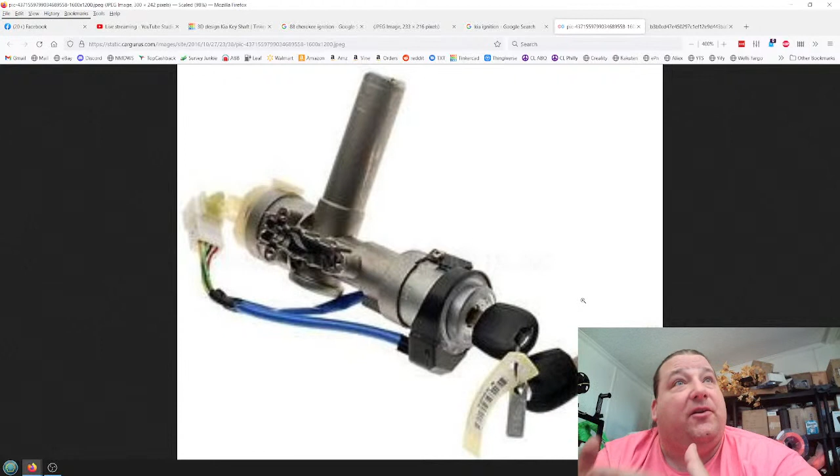The problem is a current modern car has an ignition like this, where the torque is borne by the key itself. You actually have to twist the key to turn the ignition. And that's where the 3D print gets icky, because what happens is you break the key.

See how it's all twisted up? See how the key gets broken? This was because I used silk, and that's where it sticks into the car, and it twists, it literally twists the key. And it breaks the key.

PLA actually works better, it's much stiffer. Silk is a bad choice. That just happens to be what was in the printer.

And now that means that creates a problem where you don't want to use resin, because resin is a homogeneous material. It doesn't have a preference of direction.

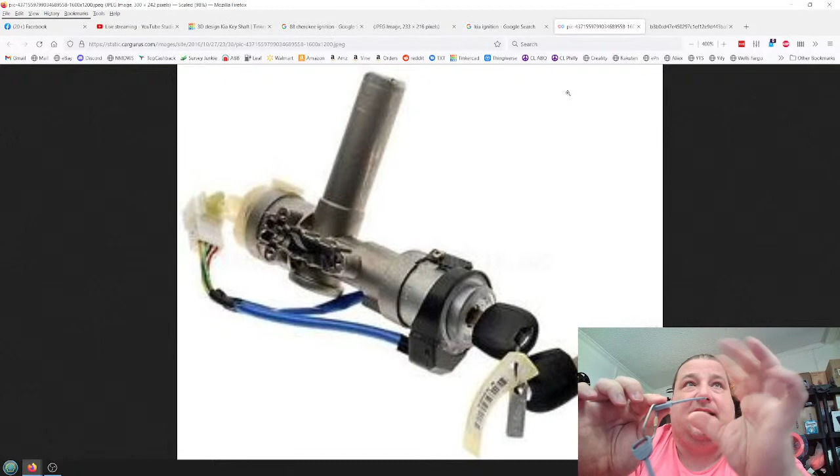And so what will happen is you will break this key off in the ignition, and then you're in trouble. Because as you can see, this will bend a lot. It's very, very bendy, and that's a problem because the key has to bear the torque.

As beautiful as the key is, I think I might have a way around it. I'm trying to find a way of doing it with just a 3D print. This here is a two-piece key. So I print the key part and I print the fob part. The nice thing is you print off a couple of these fobs and leave them lying around.

Then all you gotta do is print this if you ever lose your key. This is a 10-minute print because it's only 15 layers thick, 3 millimeters thick. So this just inserts into this, and there you go. That's a pretty good friction fit. I even got the Kia logo on there. Just why not, you know?

That print's standing up like that. Petg is softer, what I need is harder. Carbon fiber is a problem because it compromises the material. All carbon fiber filaments are weaker than their non-carbon fiber equivalents, because the carbon fiber is creating voids in the plastic, and those voids are where the plastic will break.

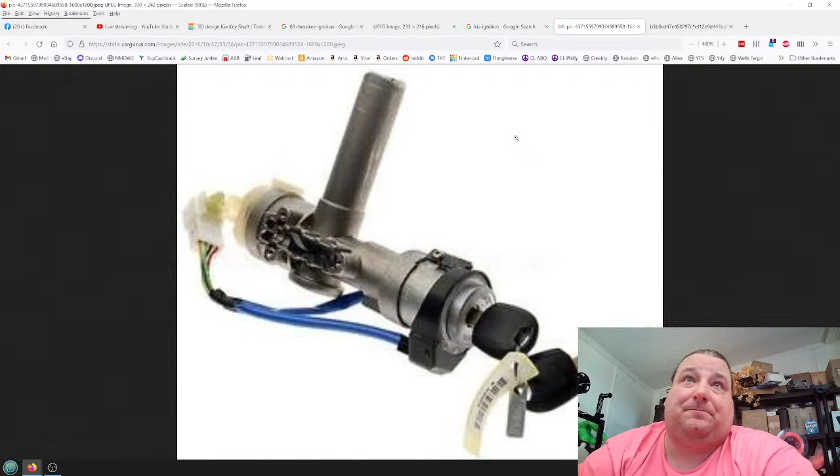One advantage of this particular car is the key. It uses this style of key. The cool thing about this key is that it's just a metal shank, literally just a square of metal with a channel running down the middle. That makes it unusually strong. So this is very optimal.

That's a deal breaker, so I can't afford to go buy another roll of that material. It's like $40. So I got to find my existing roll, but it's somewhere in my 700 rolls of plastic. When I find that roll, I'm going to try printing out of that and see if that helps.

But the issue is not strength. Strength is fine, all these plastics are strong enough. The issue is stiffness, rigidness. I need a plastic that's hard. Even this PLA key will bend inside the keyway. Now it's strong enough, it worked, but because of the bending, I would call it a limited use key.

I would like to get to the semi-permanent part. It's never going to be as good as metal, but I'd like to get to the point where it's semi-permanent. I'd like to get to that point if I can.

Someone else gave me an idea too that I would like to experiment with, not because it's related to this, but just because it would be fun. Casting one out of aluminum, that'd be fun. Just do a 2-part mold with casting sand, and try my hand at casting one of these out of aluminum. I think that'd be a lot of fun. I don't know if you can get that kind of fine detail though.

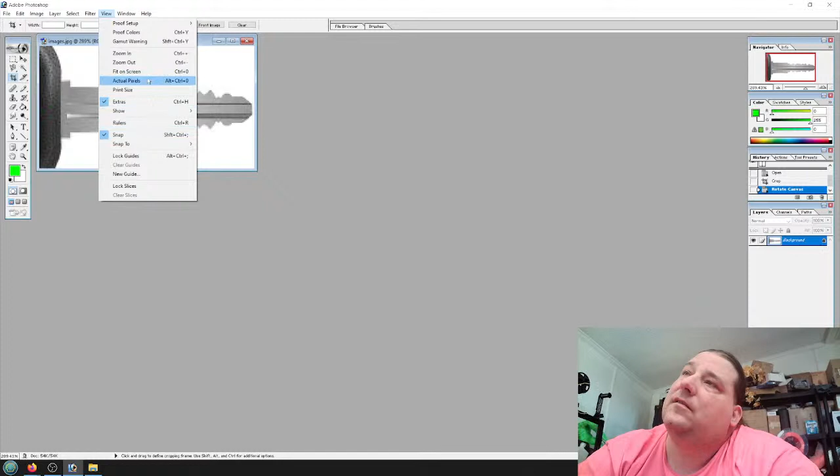That's a pretty rough picture, but it'll still serve our purpose. So you use the magnetic lasso, and you just - well, yeah, it's not working that well. This is a low resolution picture, you really need a high resolution picture. But you can see I'm using the magnetic lasso to trace out the key.

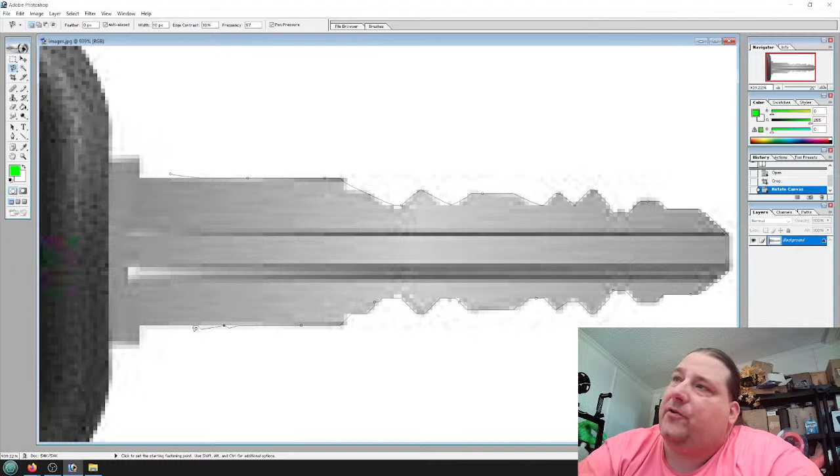Obviously a higher quality picture would make a better result. So I would then take that - yeah, too much pixel noise, exactly. But this is good enough for me to show you what I'm talking about.

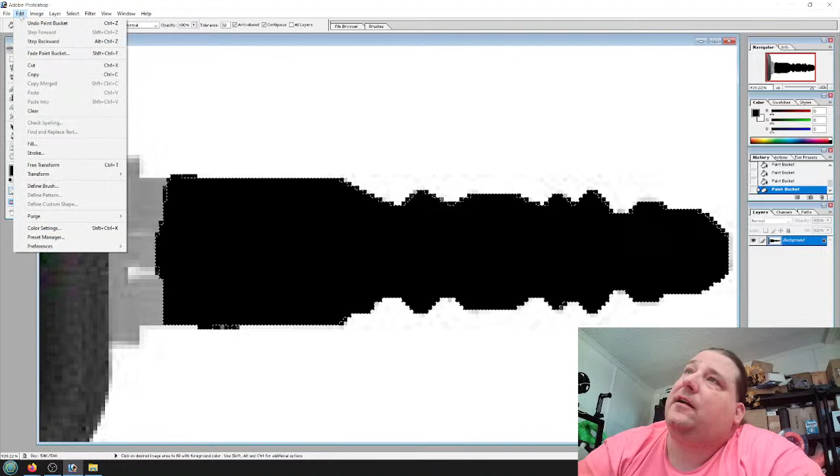Then I would do this and do a fill, get it all filled in nice and black. Edit, copy, edit, paste, get rid of the background layer. I now have this file.

Save as - we're going to save it as a JPEG. Actually, let's crop that first for efficiency. And we're going to call that a JPEG. Images copy. And then there is an SVG.

You need to convert this into an SVG. So JPEG to SVG - this is convertio.co. We choose the file, we grab our black and white file and hit convert.

Download, save file. Now in Tinkercad, I go to import and I grab my new SVG I just made. You can see it right there.

What app is that, Ben?

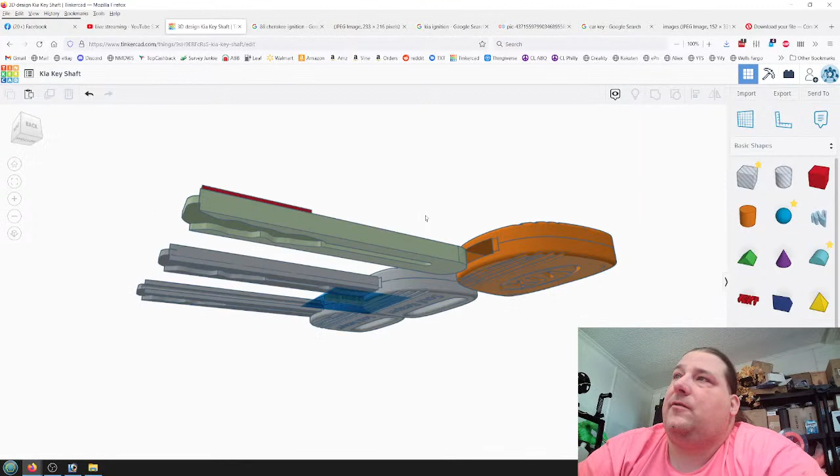Where'd it go? Oh, there it is. So there is a 3D model of our key.

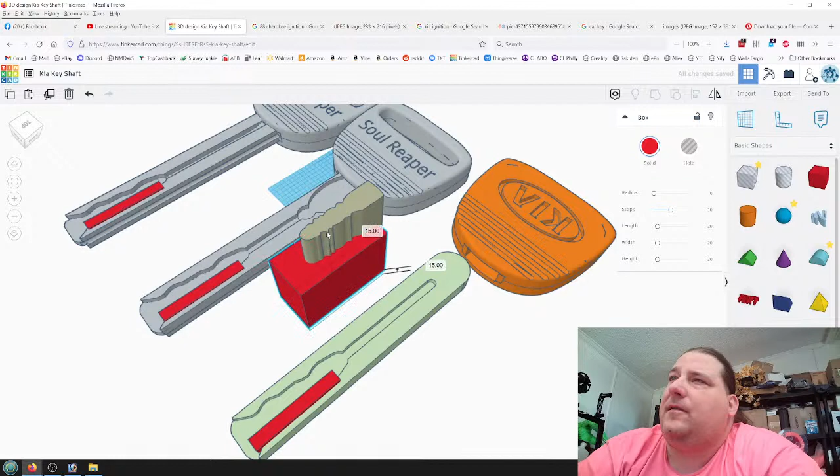Now what I would do with this is make this real tall, then put a box around it, make that taller. I would then use this as a cut tool, merge them, and there you go. I now have a cutting tool that I could use to make a key.

So what I would do is find or make a 3D model of this key. I'd need to figure out which style key this is and either find a 3D model of it. A JPEG's fine, as long as you have a high resolution picture to start with. Plus these programs don't accept bitmaps, because you can see this picture is very tiny. I need to find a 3D model of this key, a key blank. I need to find this. Or you got to sit there with a pair of calipers and make your own.

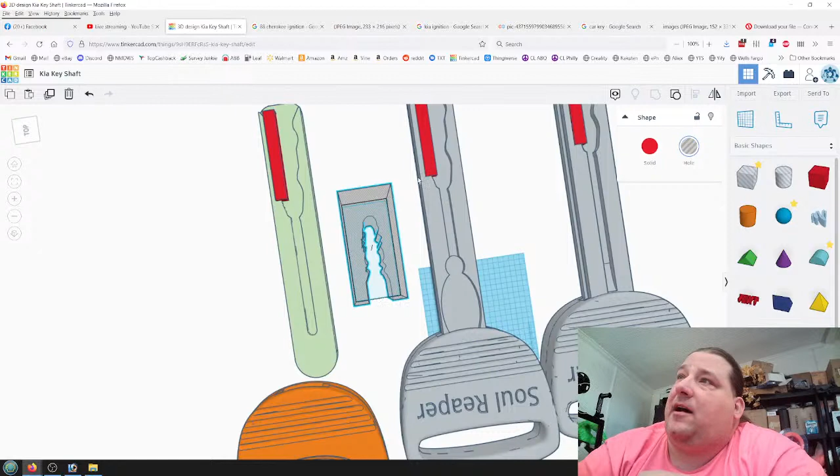But once you have your own key blank, you then bring that 3D model into Tinkercad. And then, like if we pretend that this is the key blank, you would bring the 3D model into Tinkercad and use it as a cutting tool, and you would put it over top of your key blank and cut away the outside.

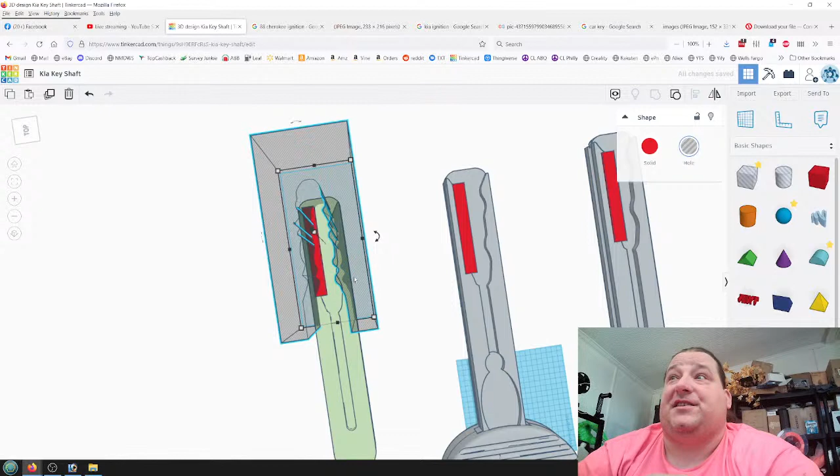And that's how you would make a normal key. As you can see, that's a bit of work because you got to find or make a model of the key, but it just so happens that this style key, the kind of key that this Kia uses, is just a 3mm by 7.5mm rectangle.

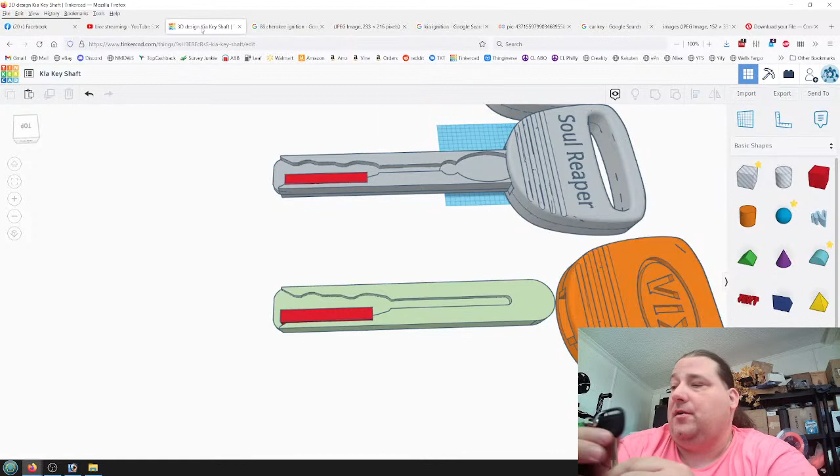So it's a whole lot easier to 3D model because all I have to do is bring in my bitting, make it 7.5mm wide, make it 1mm tall, and merge it with my 3mm blank. And that's it. So this model is actually 3 pieces.

You have this top layer, this center layer, and this bottom layer. This bottom layer is just the inverse of the top layer. So you flip the top layer over 180 degrees, merge all 3 together, and you have a key. This type of key is a higher security key, but oddly enough, it's easier for us to deal with in 3D modeling software because it's just 3 rectangular layers, which is actually kind of cool.

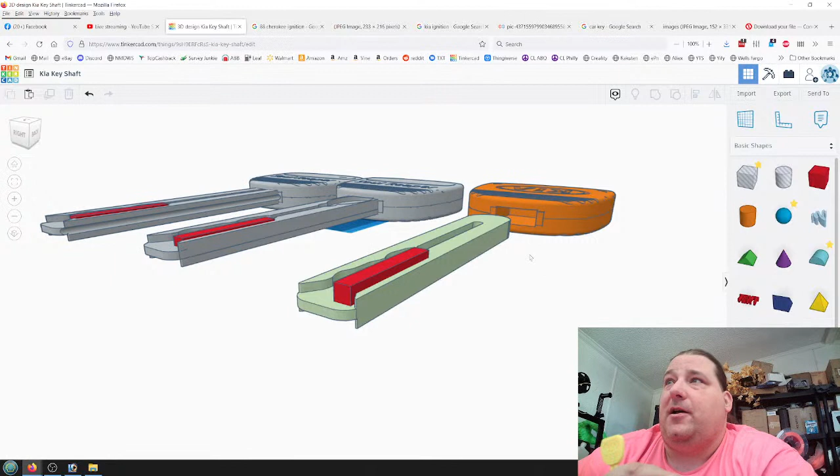Now, I do have ideas for how I can fix the torque issue. It's not ideal because I would like to fix the issue in 3D printing.

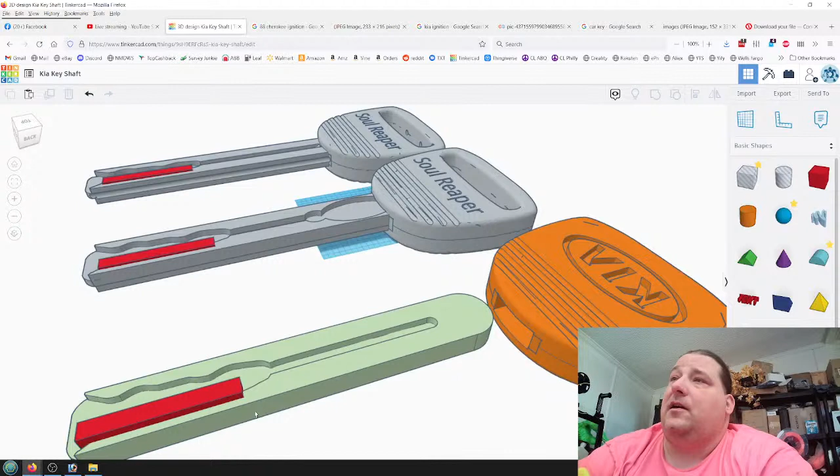Now I have made improvements to this model. You see I got all the sides smooth. I rounded off the channel here, I rounded off here. I got everything cleaned up and smoothed out so that the model itself will be as strong as possible. I also print this model outside-in so that you get that continuous outside perimeter and then it fills in the inside. That makes it a little bit stronger.

Obviously it's 100% infill. Well, 99% infill, close enough to 100%. The only place where you're going to have infill is the 3mm chunk in the middle, because everything else, there's not enough room for infill. It's going to be solid no matter what.

But yeah, that worked. And then this key, somebody had a Honda key on Thingiverse, I just stole it and modified it for my use. I filled it in, and it used to look more like that.

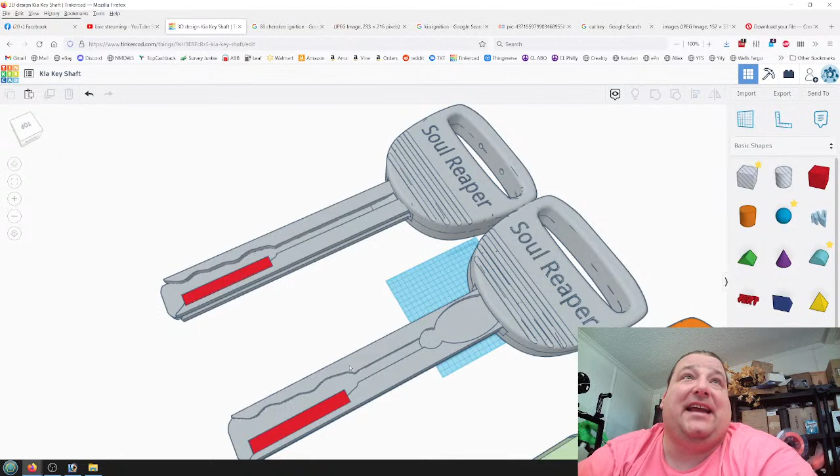Now here's the ideas I have. There's 2 things I can do if I truly can't get a 3D print to work. One, I can use an insert. So you see there's a little insert right here. That's a little piece of 1mm brass, and let me show you that.

Here we go. This stuff should be here today. I was hoping it would be here in time for the stream, but it got delayed for some reason. But what can you do?

So I got these little brass inserts. These are 16mm long by 7mm wide, which means they'll fit in the profile of the key. Now the idea is I would have this little cutout, and with a bit of CA glue, drop a brass insert on each side, and now the torque point, the point that interfaces with the ignition or the door lock, would have that brass insert partially inside of it. So the brass would take the load instead of the plastic taking the load.

Yeah, well, an injection molded key is going to be quite a bit stronger. And they have broken. People have broken them inside the keyway. But...

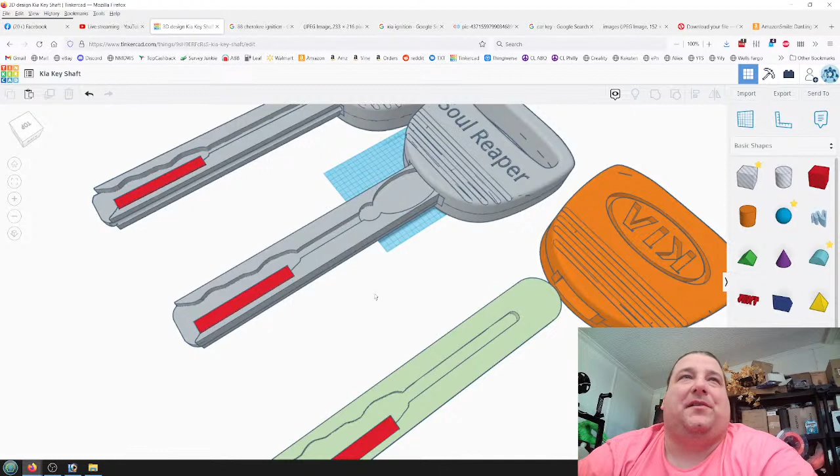This does work. If I can make it just a little bit stronger, just a little bit, it's so close. It's so close to being strong enough.

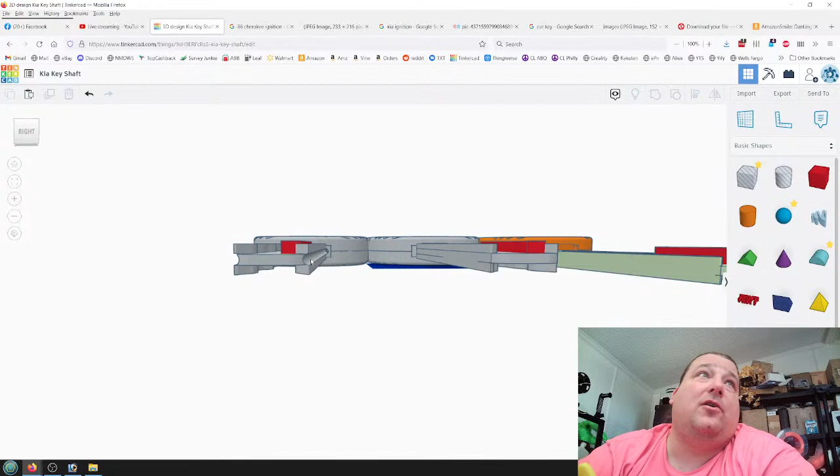And I also can do this. I could have a channel, a 1mm channel, run up alongside each side of the key and right up through the head of the key. You see the hole continues through the head of the key. And I could glue two 1mm carbon fiber rods in there. That would also help take the load. That would be especially good for resin prints because it would stop the resin print from breaking off inside the keyway. Same with the brass insert.

But I'm still going to keep trying to see if I can get it to work without an insert. Now, I did find out 35mm of the key goes inside the keyway.

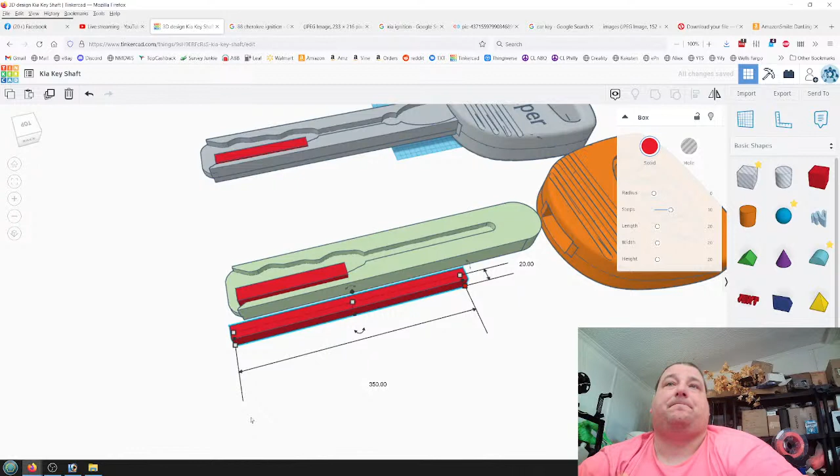Now, you'll notice everything here is 10x. Yeah, I know, that's why I didn't flip it all the way around. I do everything 10x, so this is all 10 times actual size.

So when I export these and bring them into the slicer, I reduce them to 10%. So this needs to be 7.5mm wide, so the model is 75mm wide.

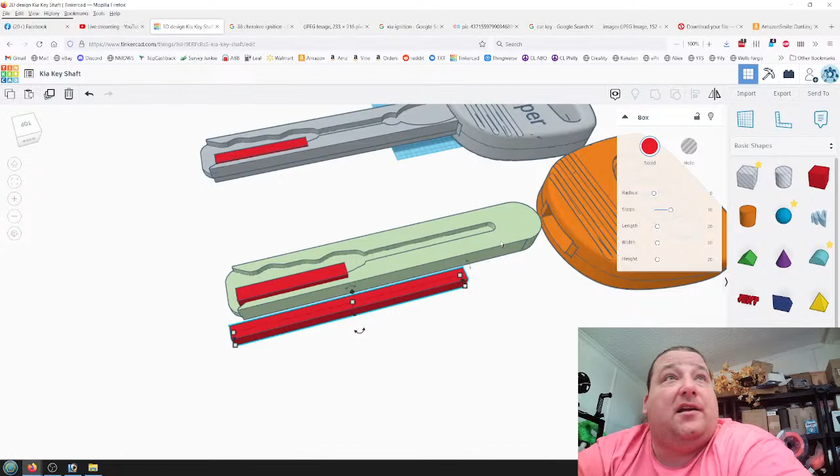It needs to be 3mm thick, I think it's 3mm. Yeah, so it's 30mm thick in Tinkercad. I do everything at 10x, it makes it so much easier to work on. Let me tell you, you try working on a 7.5mm wide object in Tinkercad, it sucks. Don't do it, it sucks.

So now the idea here is this: align, freeze this in place, align this. There we go. Now, there. So there is my torque interface.

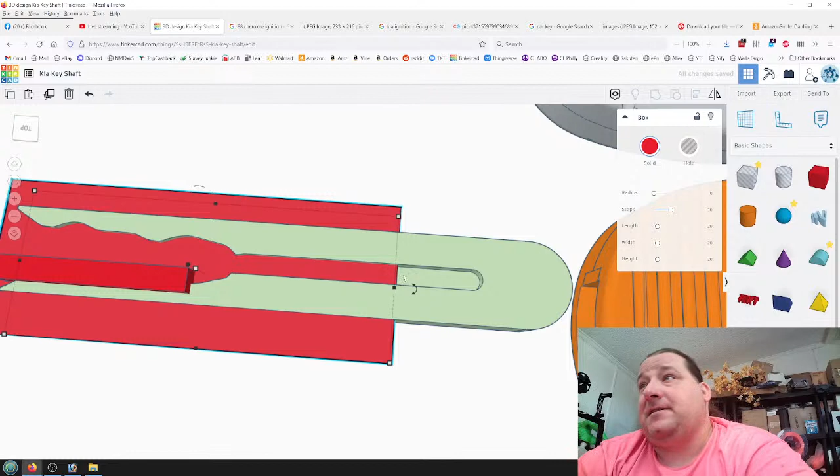So right there is the interface. This red portion will be inside the keyway, and this non-red portion will be outside the keyway. What I can then do is now I know exactly where to place this.

I think it's still processing. Yeah, it's still processing.

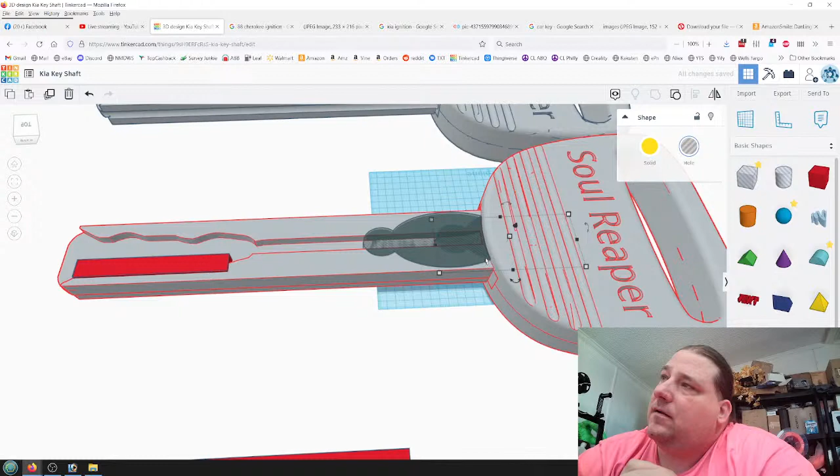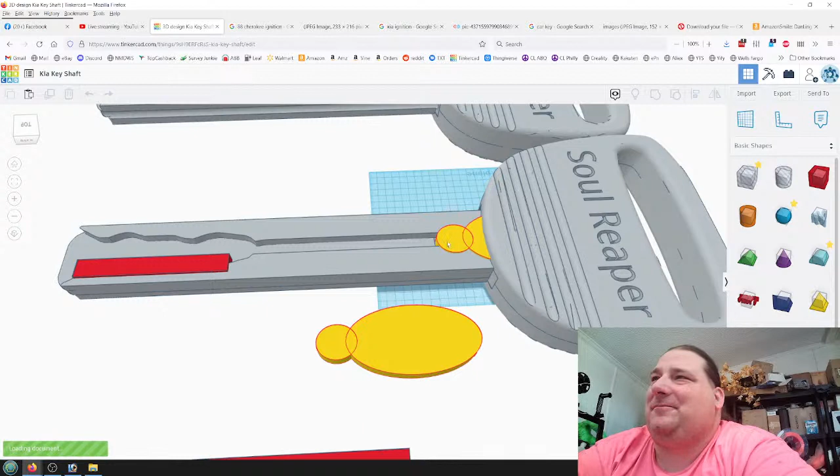Oh, I didn't want to do that. That was bad, I hit the back button instead of the undo button. Oh, now I don't have an undo anymore. That's okay.

Just gotta wait for it to finish rendering the models.

Oh, hi baby, you're hungry, aren't you? Yeah, she hasn't fed you.

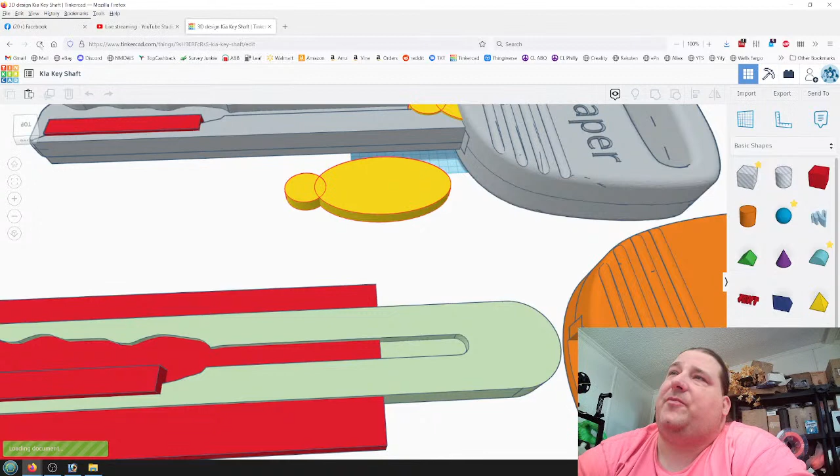Come on, Tinkercad, render the models. Yeah, thinking it might actually be crashed for it to be taking this long. Just in case it doesn't load up my blocks. There we go. Yeah, it was just crashed.

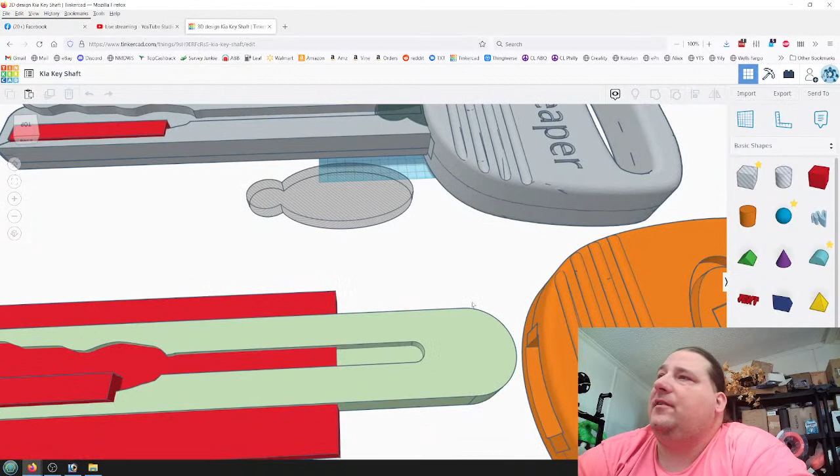So now what I can do is create a work plane right here. Bring this to 0. And now I can put this in here in such a way that it will interface the car and the key head.

Now, how much of this went into here? Where's the other one at? Because I marked how far it went into the key. That's how far it went into the key. So it goes into this, goes into about here.

So I think I can knock off like 5 millimeters off of this.

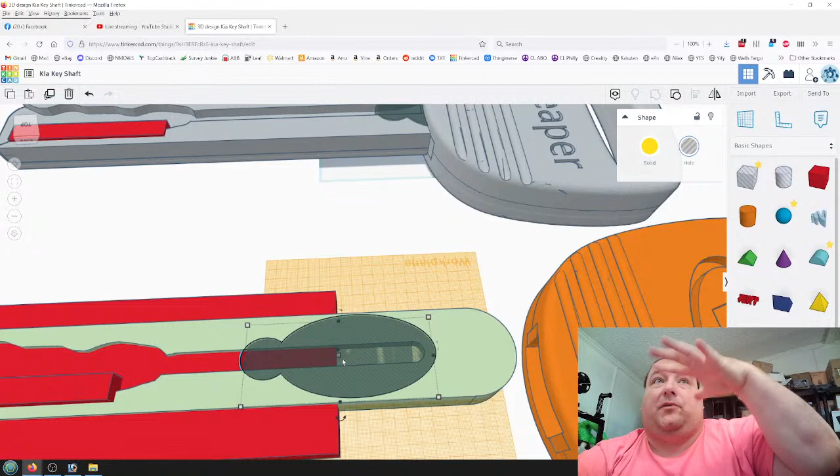Damn, is it windy? That wind is just amazing. It's actually making the carport bounce up and down from the wind passing over it.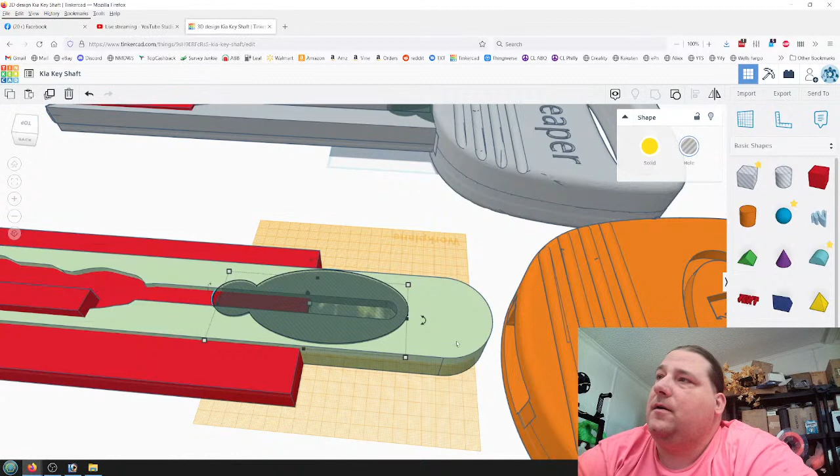So how do I want to do this? That's about where I want that. Actually, I probably want the fattest part right about there. Yeah, I probably want the fattest part there. Probably line it up at the end of that. Yeah.

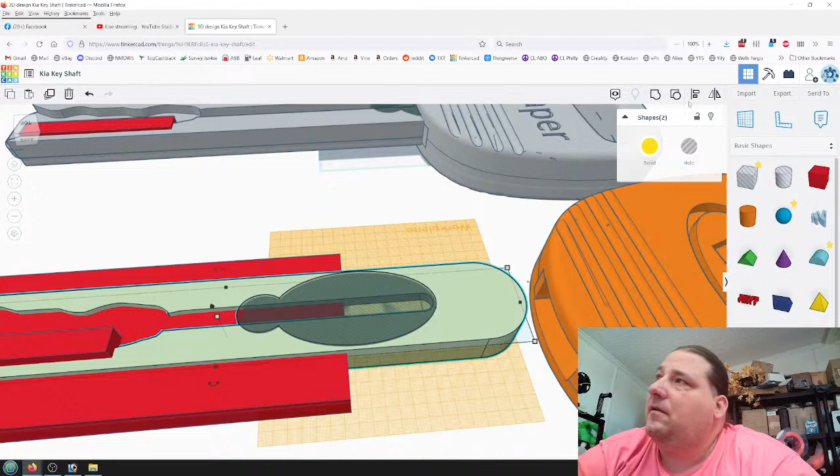So let's do this. Align, freeze this. Align centered.

Hi. Yeah, she's coming, she's gonna feed you.

Yeah, for real, the wind is crazy. It's like really crazy. Alright, so that's in the right spot.

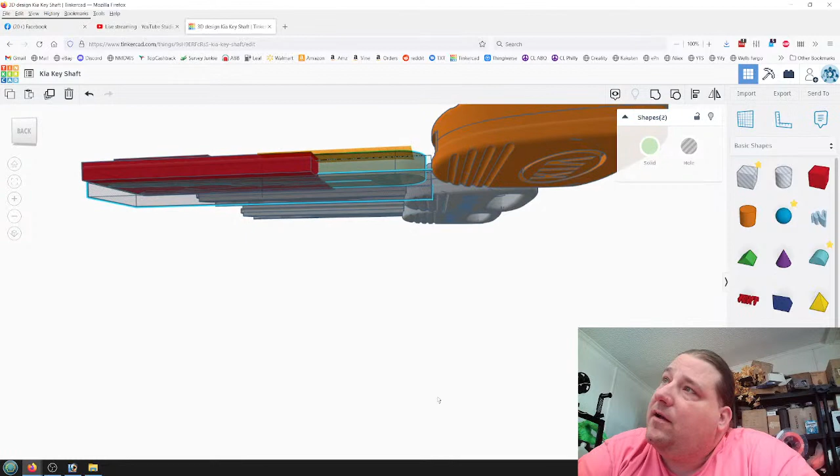Let's disassemble this. Oh, I don't think I wanted to do that. Oh, that was just cleaning up the bottom. I think it'd be easier if I just modify it.

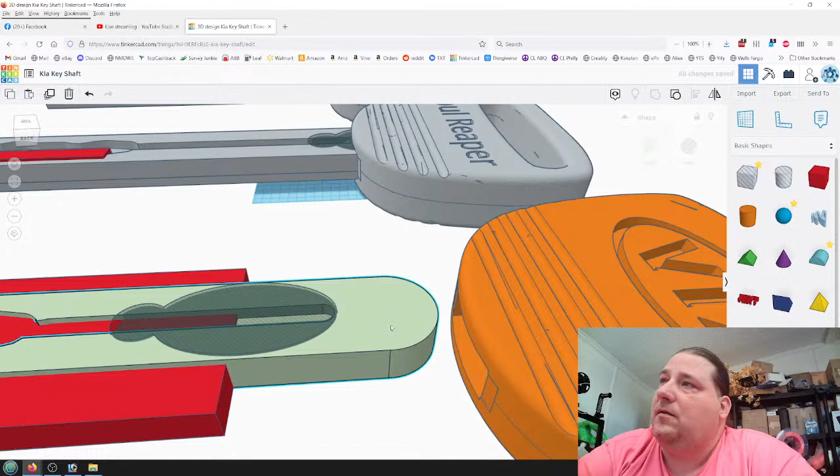Okay, Control D. So let's chop off a hunk of this. Oh yeah, that's real good. Expose it, good job.

Too windy for a kite. Way too windy for a kite.

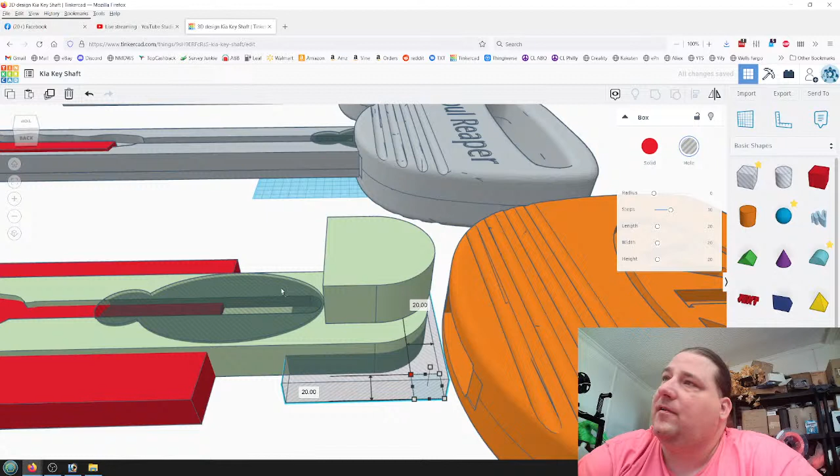So now what I can do is chop off a chunk of this. Oh, too much, I think.

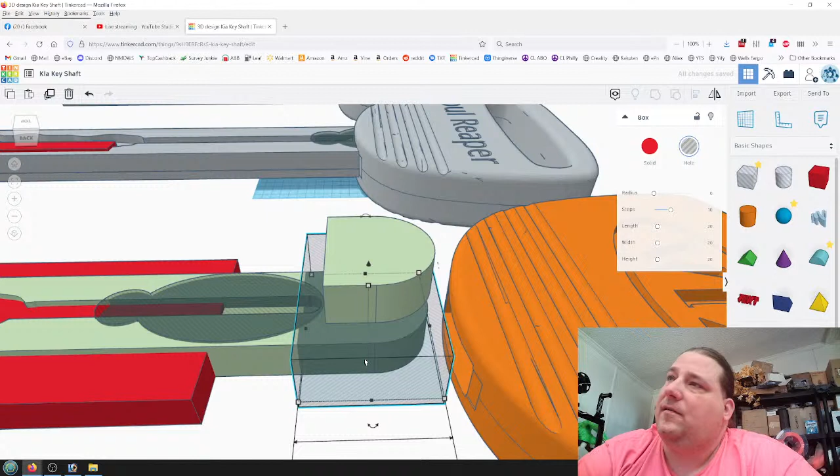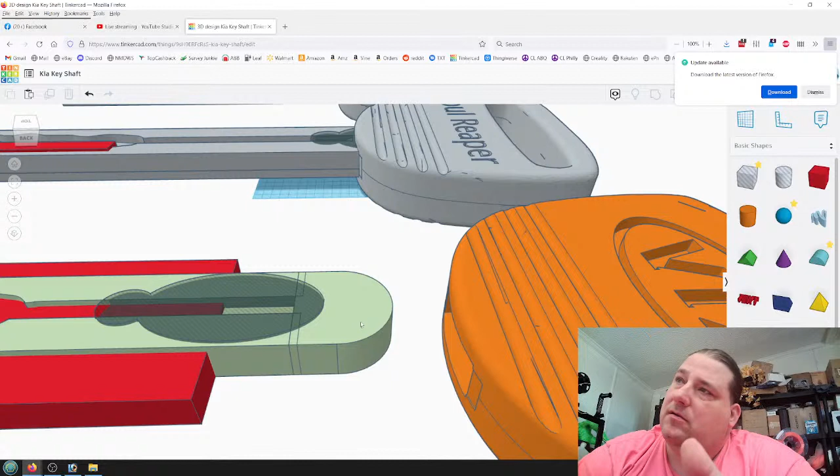Bring this down to zero, and then bring it in to an overlap, which will make it shorter. There we go, join with that. Now it's shorter, and now I can join it with this. So now it's a little bit shorter, and now I have a cutout for the insert. Obviously, I can't print this until I get the inserts and verify my approximation is the right size.

Oh, if you can make a wingsuit that'll lift 450 pounds, that'd be impressive.

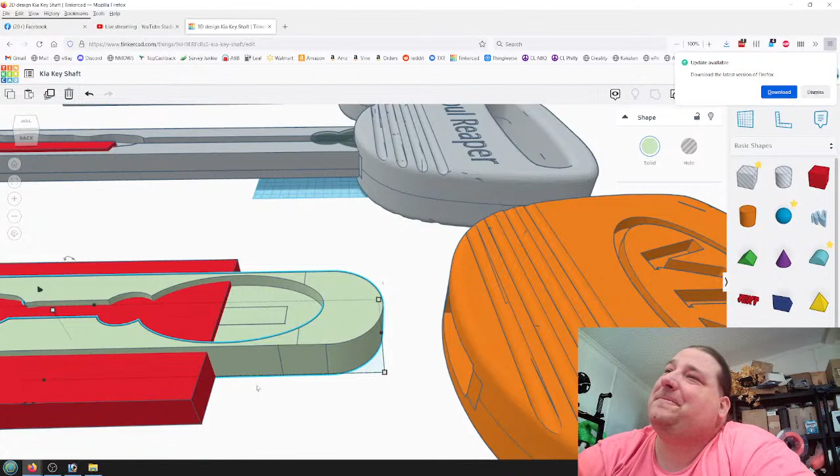So now I don't need this anymore. I might as well leave it in here as a guide. So there we go. Now the keyway is correct, and this will act as a torque interface. I just got to glue it in there. I'd still prefer to figure out a way not to glue it in there, although I can still just print the key and use it. It's just a temporary use key, and I can make the insert ones a little more permanent.

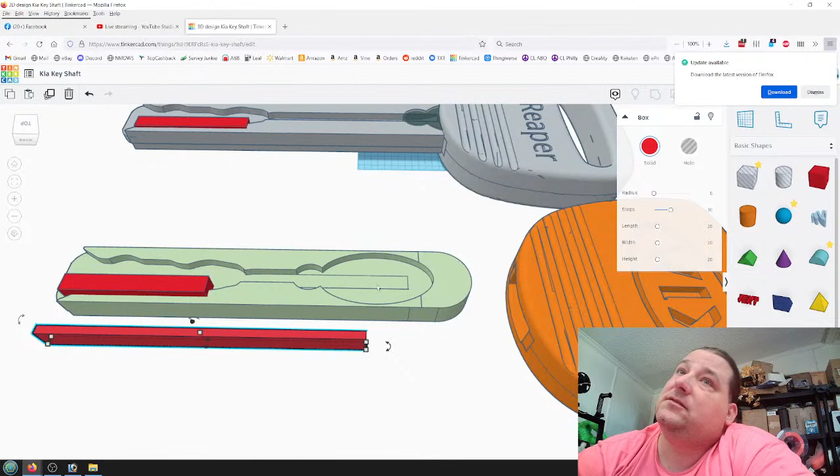Oh yeah, pretty cool. Now I can bring this over here. And I could bring this over here. Now, can I adjust this?

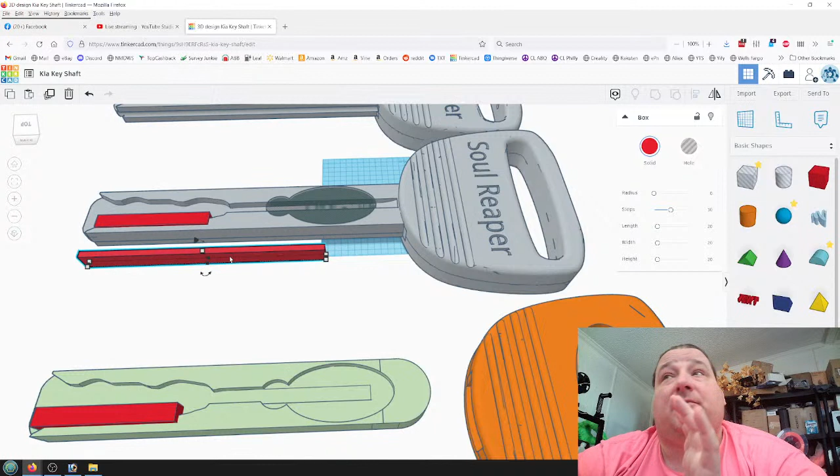These red inserts here are so you can't make a copy of my key from the picture on the screen. And this red insert here is a guide telling me, because I know the key will go into the ignition 35 millimeters. So that's 35 millimeters, that's the length. This portion of the key will be inside the car, and this portion of the key will be outside the car. So I can make the key the correct length.

Thankfully, we don't get a whole lot of that around here.

Come on, break apart. Oh, for Christ's sake.

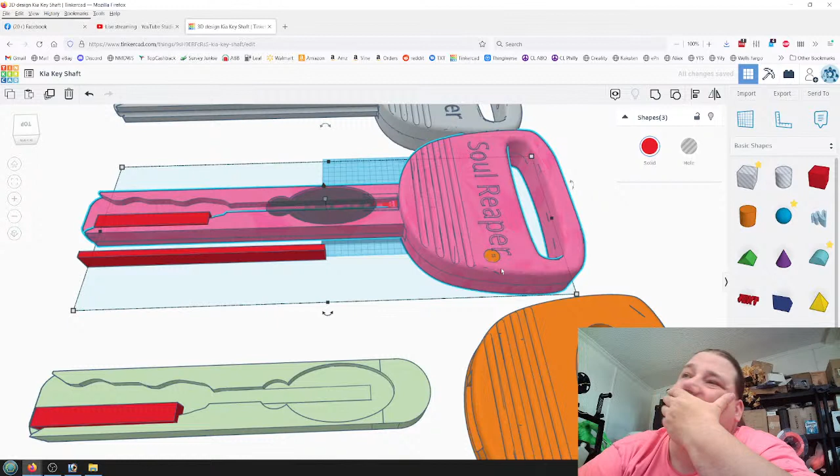Let's hide this, it's in my way. Finally, there we go. I still see a second one there. Why do I have two there?

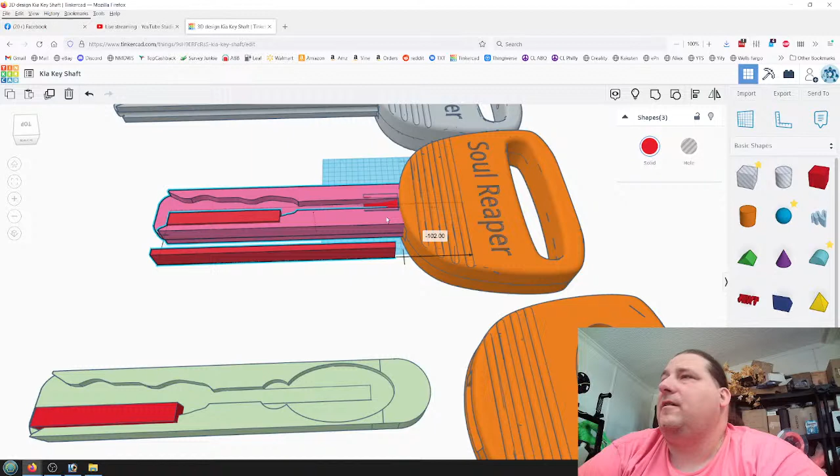So all this can be merged. Okay, now I want to grab, actually I can just grab this and slide this in to there. Let's give it a little bit more slack there. Nothing sticks out the back? Nope, okay, now I should be able to merge these.

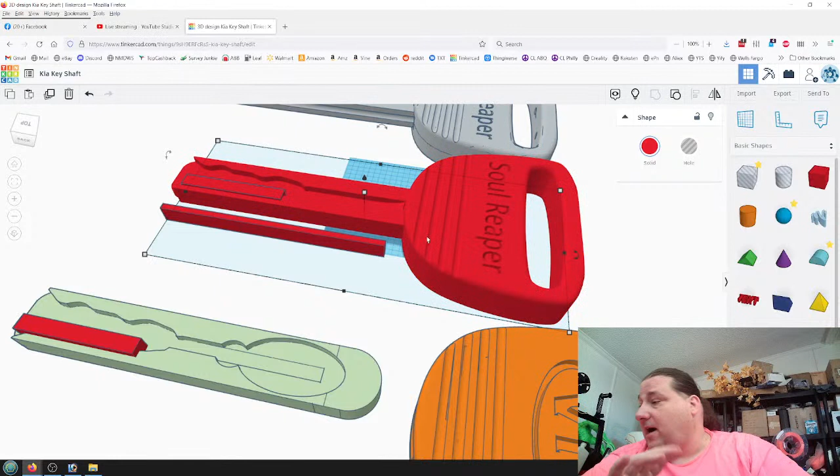Because if you actually lose the key, like you don't have a key to copy, you're looking at $108. That cost me $108, just this key, just this little key, $108. That's why. Oh, really?

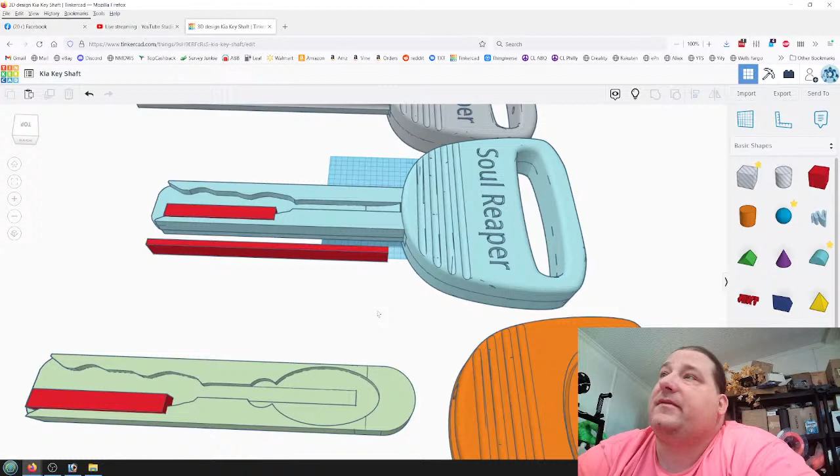We definitely don't want it to be that color. I took a picture of the key and traced it out in Photoshop, created an SVG file that I then imported into Tinkercad. I then reconstructed the base shape of the key and used the SVG file to create the bitting, so yeah, kind of scanned it. So I literally just took my phone and took a picture of the key.

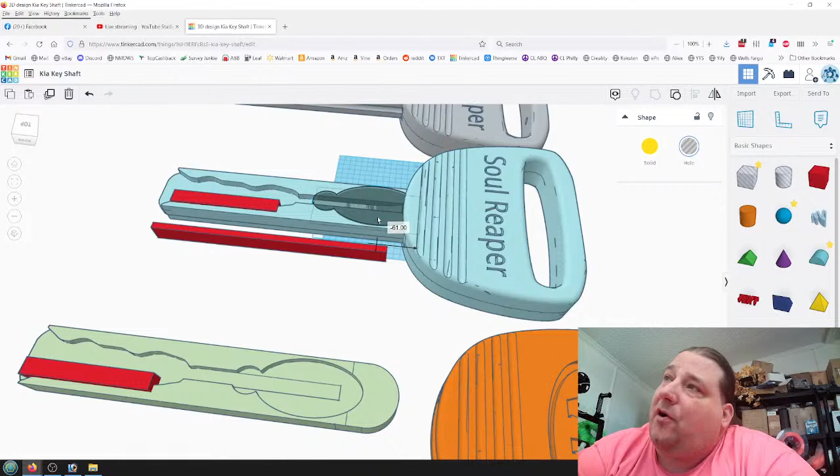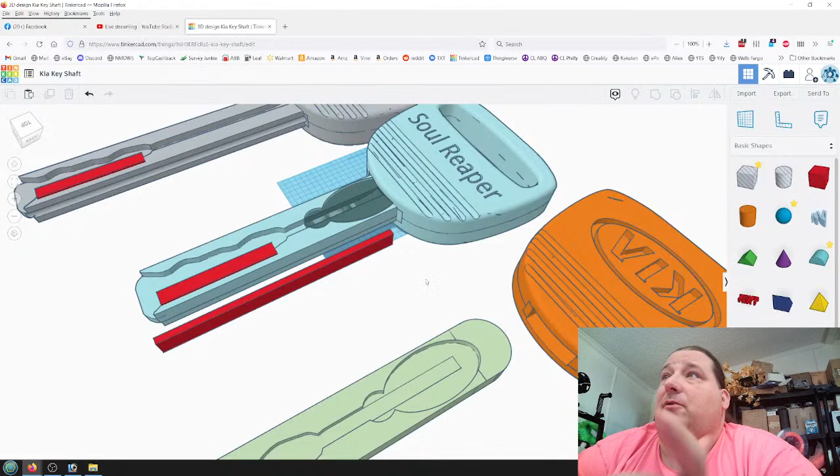So there, that one's actually pretty good. Now let's bring back my little insert here. Now I can stick the insert partially into the key, I think, like that. Now, ideally, you want to use two, so you want this insert on the other side as well. This way, the brass takes up the load instead of the plastic taking the load. But that would allow you to make a nearly permanent key.

I'm going to join this, but I'll have to obviously tweak it later.

Yes, I know, you're hungry.

So now what I'll do is I will stick that little brass thing inside there and glue it in there, and that will create my torque interface, so that the plastic doesn't have to absorb the torque.

That one I can resin print. This one I would have to, actually, that might work too. But I like the idea of making a one-piece key on the resin printer. I just like the idea of being able to make a one-piece key.

Hey, Michelle! Michelle!

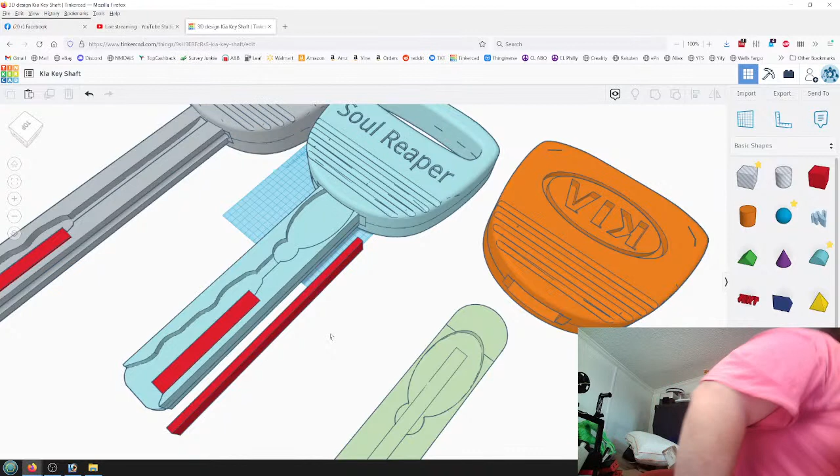Well, I guess I gotta go knock on her door. I'll be right back. Gotta get my lazy butt up and go knock on her door.

Hey, come on, cats are hungry. He pulled the tubing through the door. He's got a hold of a piece of it underneath the door. It's all out in the hallway.

What? What do you mean? The tubing's in the oxygen tube, Cal. I don't fucking know.

Yeah, come on, get up. Looks like you might want to turn it up to 72. Go take care of it when you get up.

Let's go, cats are hungry. They're losing their shit out here, both of them. Yeah, they're like running all over the place. They're starving. Huh? Yeah, jumping all over everything. They are very hungry.

I finally managed to get all of the food brought inside, so now I no longer have a freeze risk.

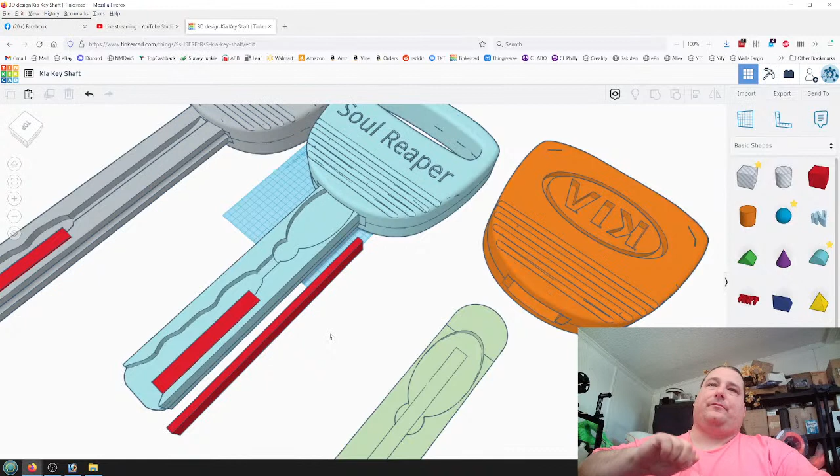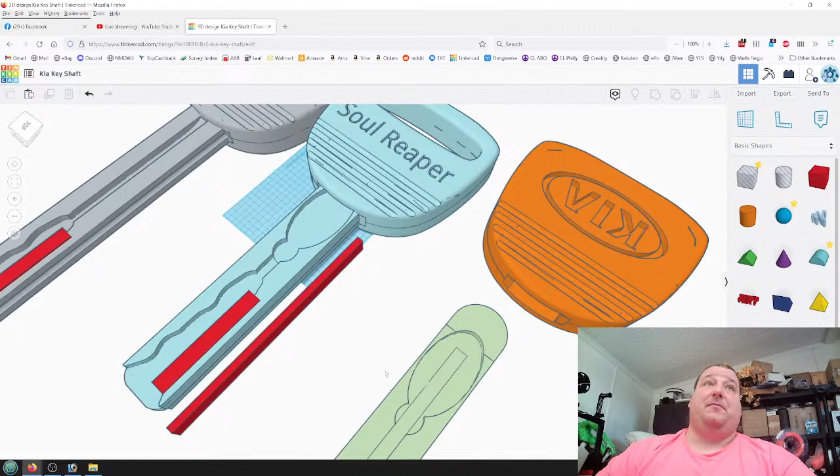So yeah, this does actually work. I am able to unlock the door and I am able to start the car. Obviously I don't just go like that, I turn it nice and gently and give it a squeeze, make sure it's turning without breaking. And this should allow me to make a semi-permanent key. I think the carbon rods are going to be a pain in the ass, but I think the brass inserts will work really well, because that will allow the brass to absorb the torque instead of the plastic absorbing the torque.

And maybe I can get away with one, maybe I only need one brass insert. I don't know, I'll have to try it.

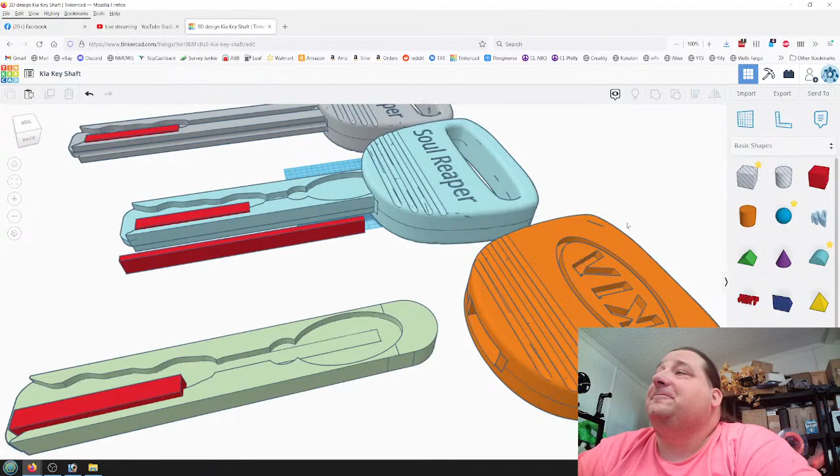I couldn't find any. Does anybody know where I can find any good models of key heads? I can't find any good key head models, you know, this part, the actual head of the key. That one's pretty close, that's the only one I could find.

It was a Honda, an old Honda key fob. It was actually made to be an enclosure, so inside here was all hollow, and you'd have two halves, and you'd stick it around the key. Well, I just filled it in and made it into a solid head.

And then I did the same SVG trick to grab the Kia logo, and it looks real deep on here because it's 10 millimeters deep. But remember, when I shrink the key 10%, it's only going to be 1 millimeter deep once you actually print it. There it is.

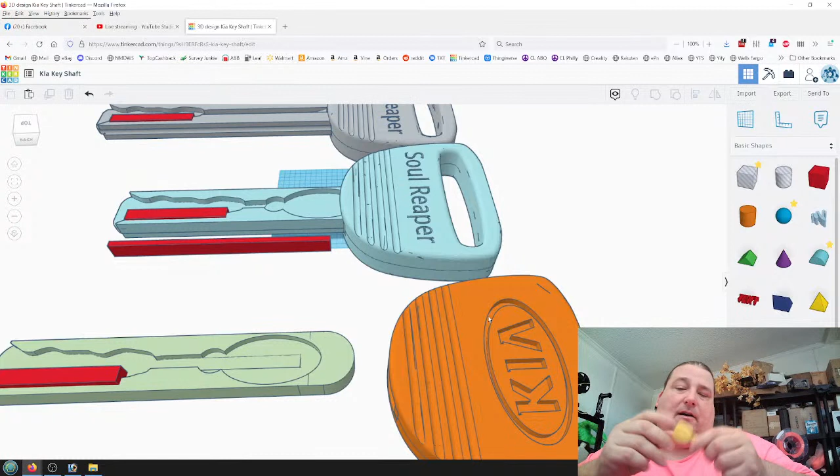And this is one of the few times where the FDM PLA was actually superior to resin. I mean, the resin key is obviously cleaner and beautiful, it looks absolutely gorgeous. But I could do the heads in resin, so I can have a really nice, pretty head, and then just print the actual key blank, the shaft. Just print this in resin and print this in PLA. I could do a whole platen of these and just leave them lying around.

And so now I want to do the rest of my keys, see what kinds of keys I can do. The problem is, how do I find the key? Like, you know how you can go to McMaster-Carr and they have 3D models of all of their stuff? Well, I wonder, 3D models of key blanks.

No, the tough resin would make it worse. The problem is it's too flexible, I need less flexible. So I'm thinking about trying Siraya Blue, and I'm thinking about trying Onyx. But the problem is too flexible, I need less flexible. So I need something like this.

I need blanks of keys. Okay, so here's some different keys, Weiser. So here's some different keys. The common household keys are going to be Kwikset and Schlage. TPU is too flexible, I need less flexible.

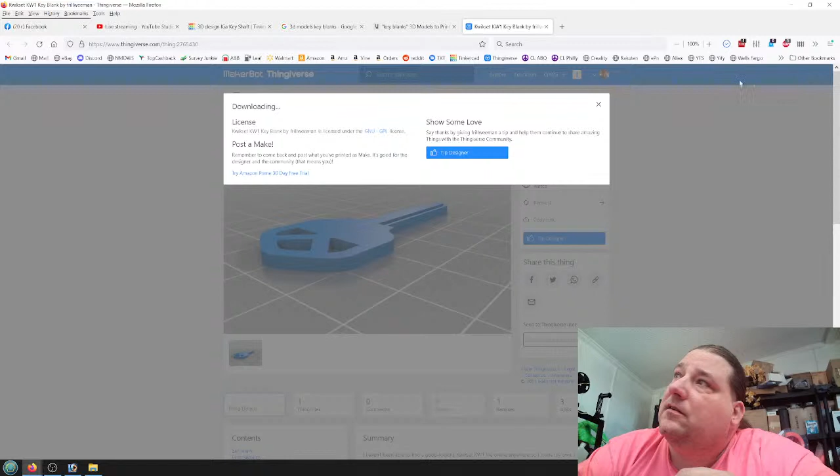So here's your Kwikset key. See this? See what I mean? See how this has got the shape you need? It's got the profile, that's the word, profile. So there's a Kwikset key. So now I can make any Kwikset key, although I don't have any Kwikset locks.

Schlage, I think that's how you spell it. That looks like it, because that's a Schlage. So now we got that.

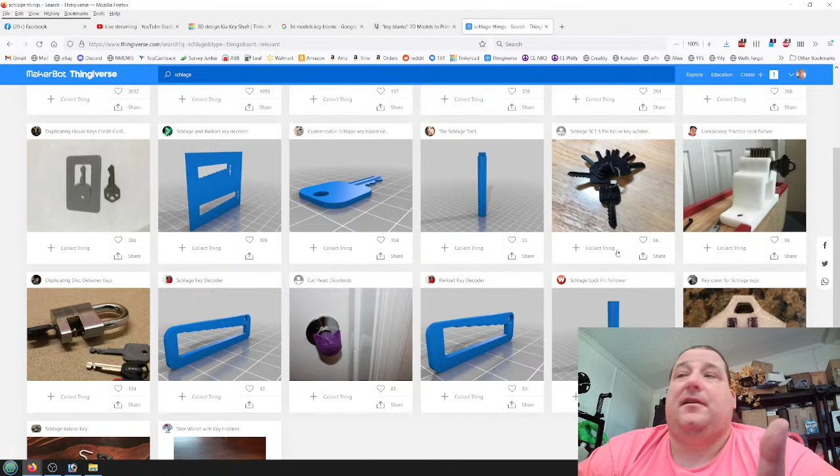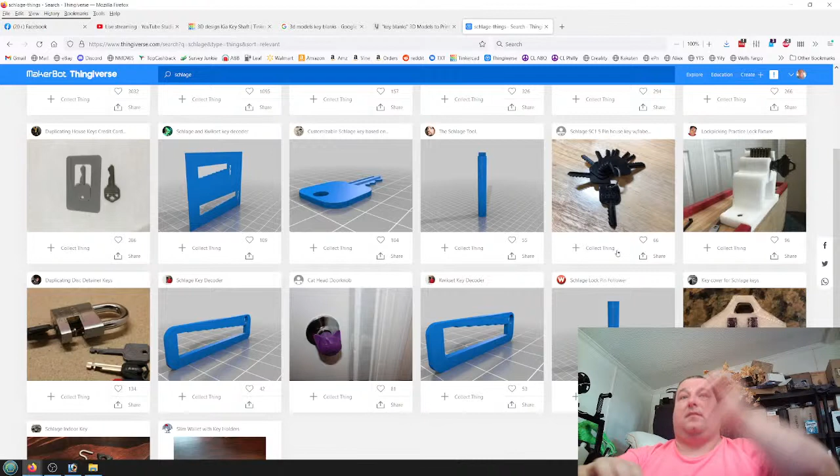But how in the world would I find a blank of my bus key? How would you even look for that? Do I have any other keys in here? Nope, no keys in there. I would want to find keys for all my padlocks and stuff like that, so that if I lost a key, I can make a key. See, the nice thing about 3D printing a key is even if you can't use the key, you can use it to make another key, as a guide to make an additional key.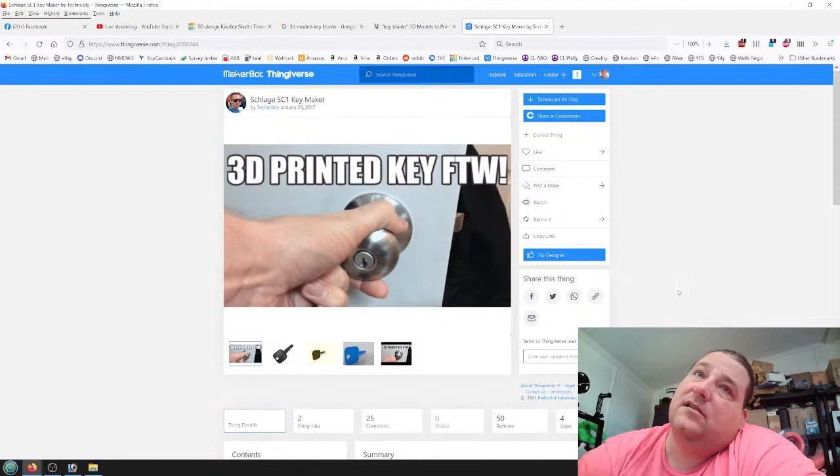Oh, interesting. Now, see, this is cool. This is really cool. So that's what these are for, these decoders.

A lot of people don't realize that keys are pretty standardized. That's why they were able to contact the dealership with my VIN number, get a code, and punch that code into their key making machine to make me a key. The reason that works is because keys are standardized. Think of the key as less a custom bitting and more a generic set of bitting that uses a combination. So your key might be a 13356, and that number determines how deep the cut is.

And so you could use something like this to decode. See here what the guy's doing there? You can use that to decode what the bitting of your key is.

Why would locksmiths refuse to take a 3D printed key as a master? Because they want you to pay the $108 for the key to order it from the dealership. Yeah, so they're criminals. So they're crooks.

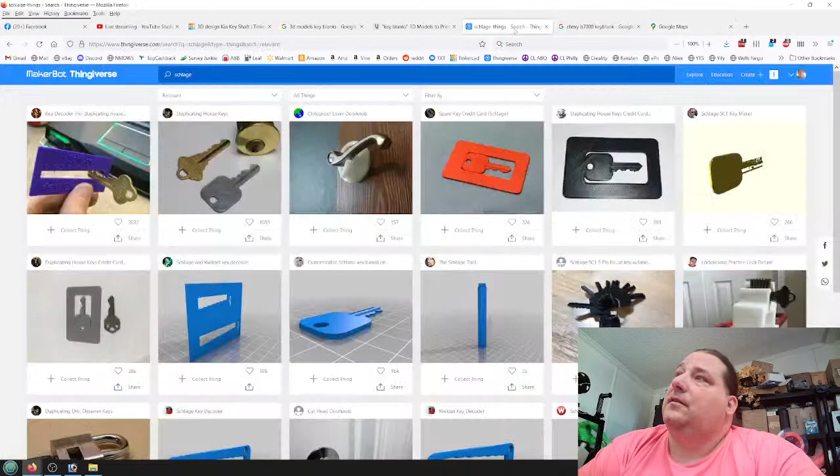Yeah, that's something. It looked like the same key as my Jeep took, so it probably is. Let's look that up. GM key 3D model. I bet you, because that's such a common key. The problem is it's old.

There, oh, there it is. That looks like it. That might be it right there. I want to load this one. Visit.

Where is it? It's not here. Let's do GM. No, that's from Poland, that's a modern key.

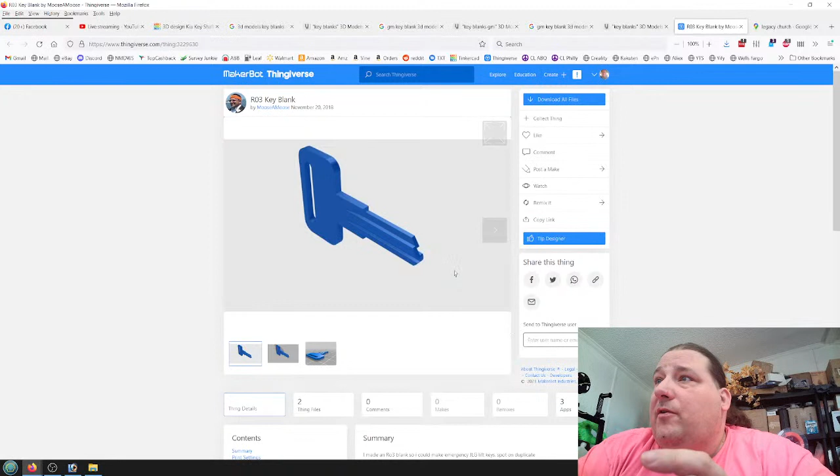See, this right? That looks like it right there. At least it's a similar style. But I don't know if that's the actual shape. I'll have to compare it to the bus key.

Key blanks, Nissan? I'm trying to remember what my Quest key looks like. I don't remember what it looks like. It's not a modern security key, I don't think, it's a regular key. Ha! Autobot key cover, I like that.

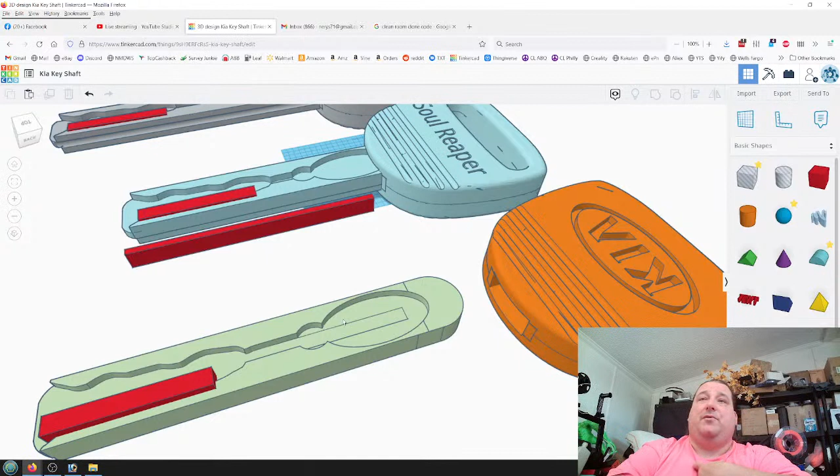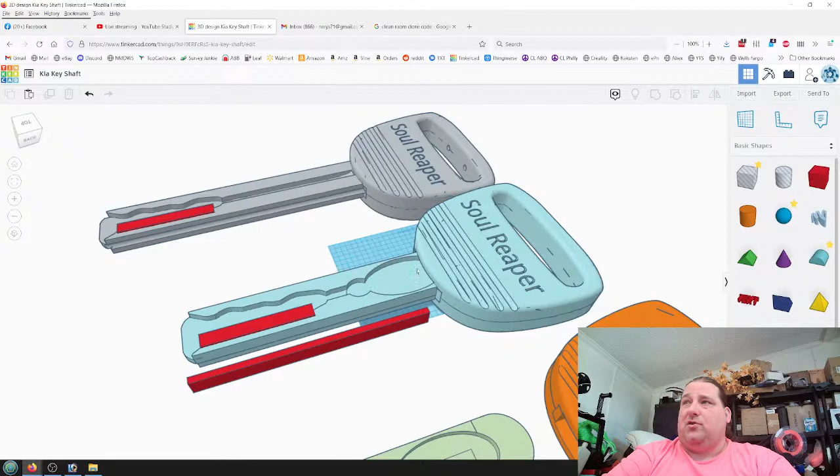Because I don't have the ability to cut aluminum or steel. And for me, the project is, can I 3D print it? So the other idea is to resin print them and put an insert in here, a little brass insert, so that will absorb the torque load. So this right here is how much of the key goes inside the car. So right here is the torque line. So the little brass plug that I stick in there, that would absorb the torque.

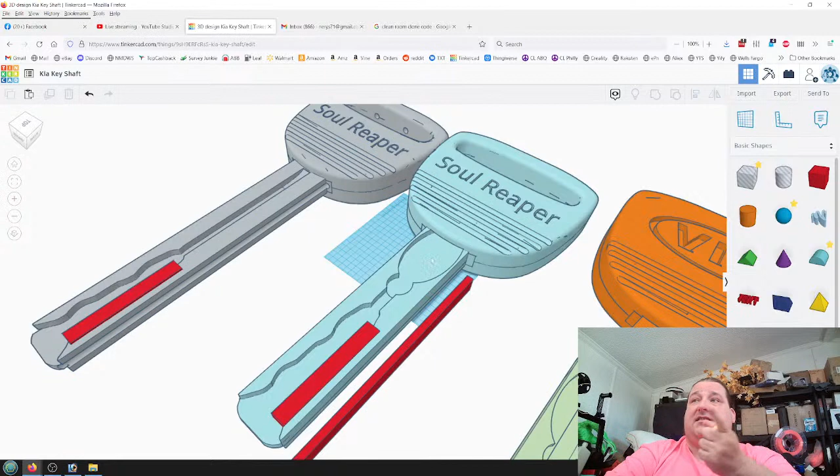I also made this version with 2 1mm channels going straight through it for 1mm carbon fiber rod. So I'm going to try both. I think the brass insert's going to be the easiest and the best solution, because I might even be able to get away with one. This has an insert on both sides, but I might be able to get away with one. And so what I can do is I can resin print the heads because it looks pretty, and then this part here, you can print that in 10 minutes. It's like a 7-minute print. So it's about 10 minutes with warm-up time.

Actually, the older ignitions will work better. The older doors will be harder. Your door is going to be harder, but your ignition is easier, and here's why.

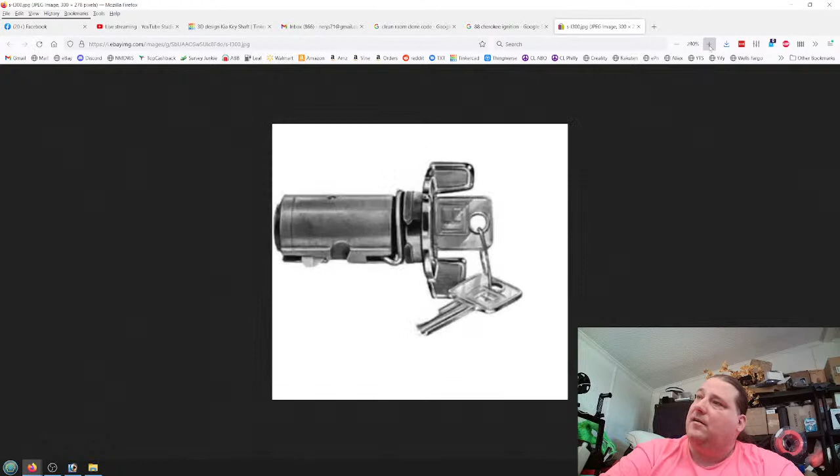Because the older cars used this, the key would insert into the car, and then you would have that tab, those paddles, and you would turn the paddles so you're not torquing the key. Assuming you could find a blank model of your key, or make a 3D model of it, this one was unusually easy because it's just a rectangle. But assuming you could find a model of your key, it would actually be easier because the paddles take the torque, not the key. Because these old keys, you'd shear the key off. Even a brass key, you would shear it off if you tried to turn it with just the key.

That's usually what would happen, is that a person would break one of these paddles, and they'd start using the key to turn the ignition, and eventually they would shear the key off inside the ignition, because it's just not designed to take that kind of torque. So oddly enough, if you have those paddles, if you have ears, this would actually be easier. If you don't have ears, it'll be harder because the older ignition systems are more physical, meaning it takes more force to turn them, especially because most of them are 10, 20, 30 years old.

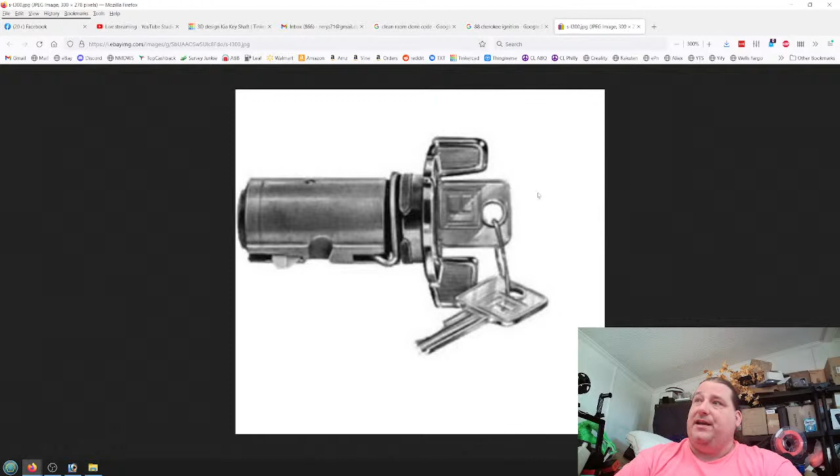So in theory, there are ways around that. For example, here's one with horns, and here's one without horns. What you could do is insert your plastic key, and then I would put a little slot right here in the ignition. I would Dremel a little slot that I can stick a screwdriver into. So I would insert the plastic key and then stick the screwdriver in the slot next to it and use that slot to generate the torque to turn the ignition. This way I'm not torquing the plastic key as much.

Not all of them have the ears on them. You see, this is an old car and it does not have ears. And this is an old car and it does have ears. So this is a really old one. Yeah, that's an old key, and it does not have ears. So what you'd have to do is make ears, you'd have to make something to allow you to apply torque.

But the reason I did this was because when I lost the key, it cost me $108 for that key. That key right there cost me $108. Well, I'll never have to pay $108 ever again.

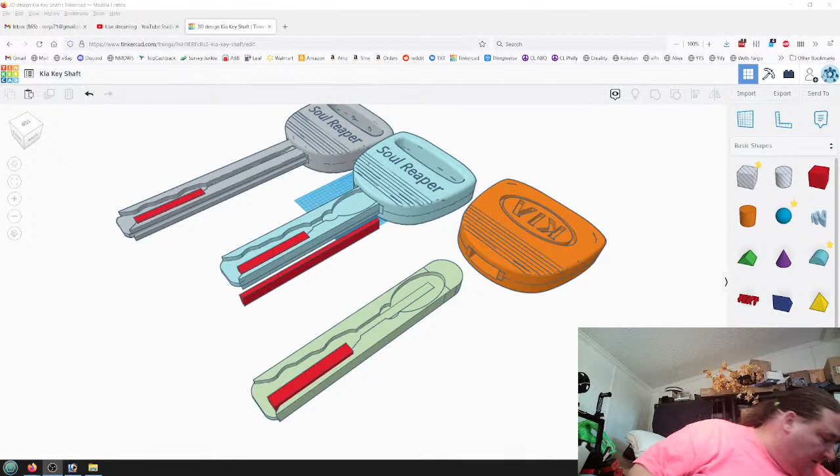I grabbed my phone too. I got some cards from Costco, only 11 bucks for a really nice set of 40 cards. So tonight and tomorrow we're gonna get all of our Christmas cards filled out and in the mail. I love sending out Christmas cards, it's fun.

Yeah, Ortur does good, they seem solid. Actually, I think I have the X-Tool D1 out there, that's an expensive one, like 700 bucks. I think I have that X-Tool D1. Let me see, what do I have?

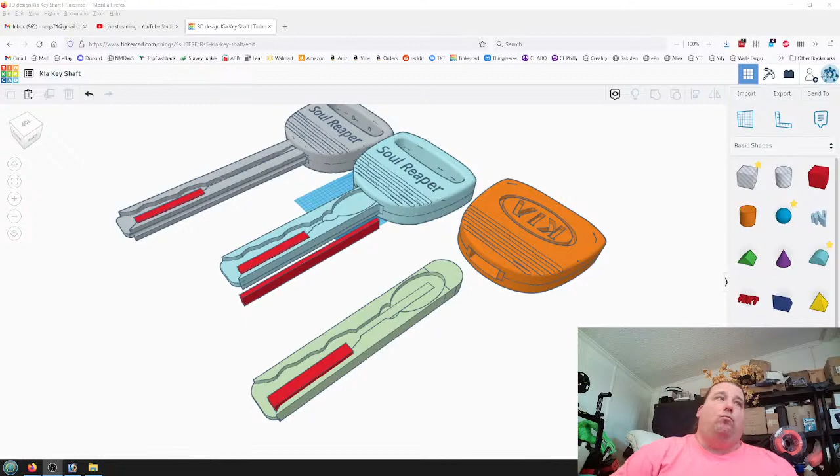Let's see, laser. Yep, Makeblock xTool D1, 60 watt. So I do have that in the box outside. So we will be playing with that at some point.

And from my personal experience, decent support as well.